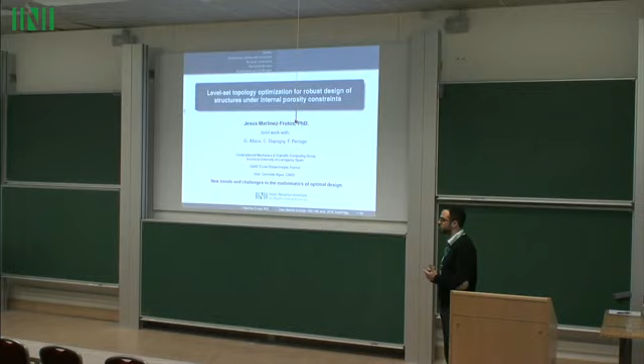Well, thank you. First of all, I want to thank the organizers for inviting me to this workshop. I'm going to talk about a topology optimization approach that deals with the negative porosity effects that appear during manufacturing as imperfections. This is joint work with Grégoire Allaire, Dapogny and Francisco Periago.

Well, this is a brief outline of this presentation. Before presenting the proposed porosity constraint and numerical results, I'd like to motivate this talk by presenting some examples in manufacturing in which this kind of defect appears.

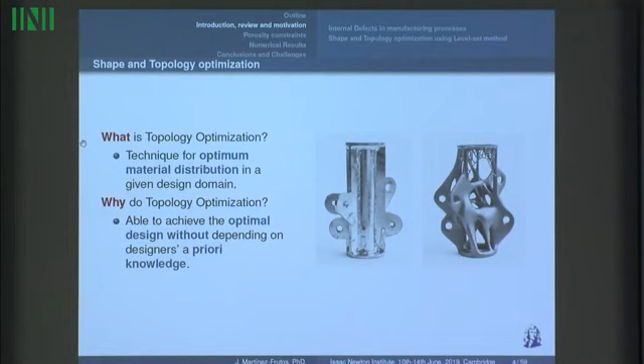Basically, in topology optimization we aim at finding an optimal material distribution in a given design domain, which is subjected to loads, boundary conditions, and possibly constraints, with the final goal of improving the performance of the structure. There is also an appealing feature of these techniques: they provide an optimal design without depending on the designer's a priori knowledge. This makes topology optimization very popular in industry.

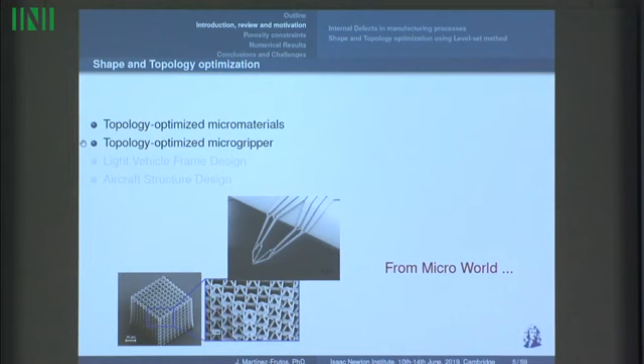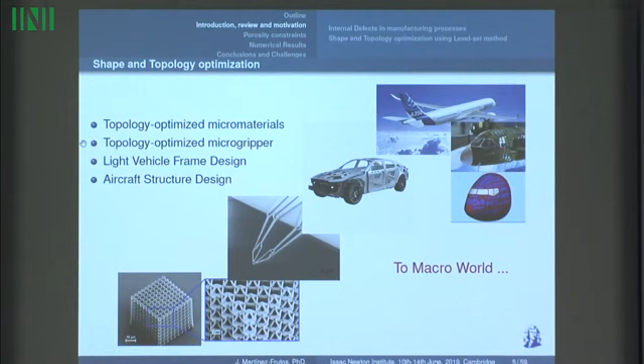Nowadays this field is quite mature, and in the last 20-25 years there has been great improvement and many successful applications of these techniques across many fields, obtaining innovative and high-performance designs at the very early stages of the design process. Some examples are the design of micromaterials, metamaterials, and micro grippers, as well as applications in the automotive and aircraft industries. These two industries have pushed topology optimization methods a lot.

More recently, there is increasing interest in incorporating real-life issues into the formulation of topology optimization, with the perspective of bridging the gap between mathematical models, conceptual designs, and concrete applications. Some examples are those I'm going to present now.

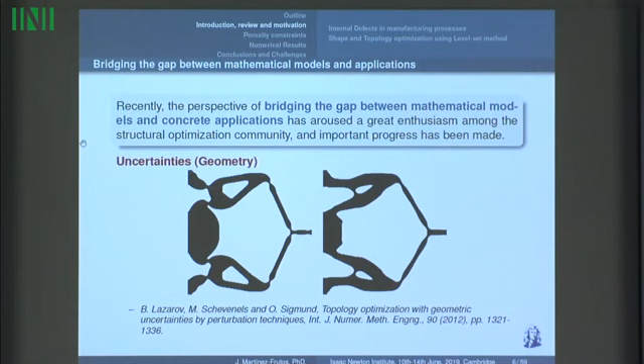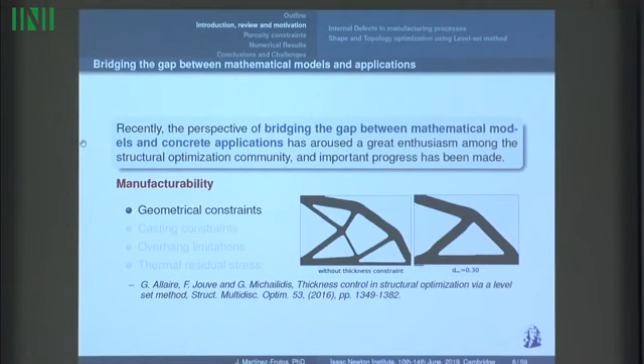Another very prolific research field, which tomorrow we will have a nice presentation on, is the introduction of manufacturing constraints. I don't want to present an exhaustive review here, just to mention some works related to the porosity constraint indirectly. The first is the introduction of geometrical constraints, for instance minimal and maximal thickness. We'll see that this maximal thickness constraint relates to one of the very important defects found in casting, which is shrinkage cavities.

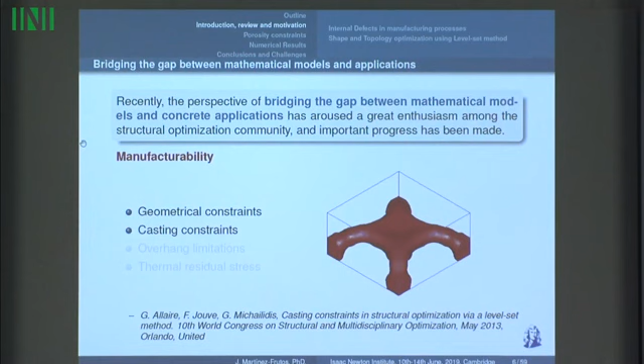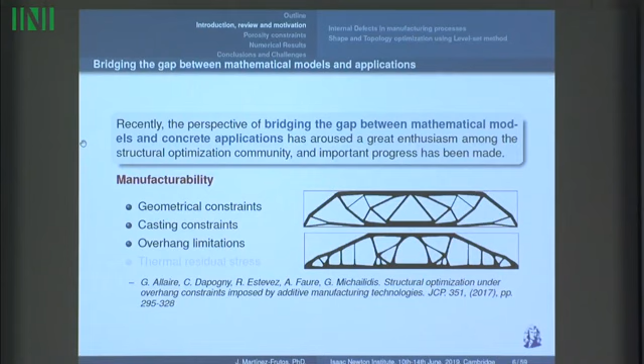Another manufacturing constraint is the casting constraint for moldability. On Monday we saw a presentation about overhang limitations for reducing the material devoted to supporting structures in 3D printing. More recently, there are also improvements that take into account the thermal residual stresses and deformations that can be produced during processes like selective laser melting.

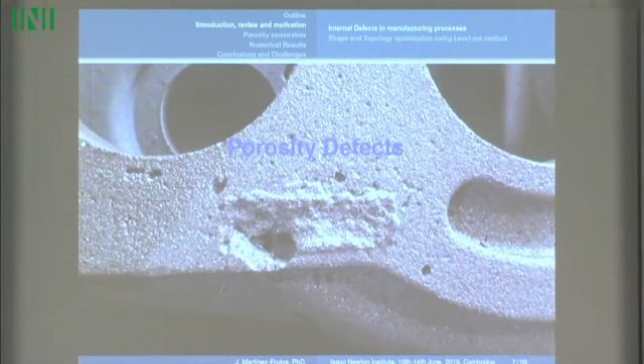This presentation is devoted to addressing the negative effects of porosity. What is porosity? Porosity is the parasitic emergence of small bubbles of air inside the material that occurs during the manufacturing process. For those not quite familiar with these kinds of defects, I'm going to present some examples in which we can find these porosity defects.

The first one is casting manufacturing. In casting manufacturing, we want to cast a metal into a shape, and this is done by melting it, then putting it into a mold, and then removing the mold material once the metal has solidified.

In this process appear lots of issues, most related to the different properties of the metal in liquid state versus solid state. One of them is the different capacity the material has in liquid state to dissolve gases. During the cooling process, these gases get trapped inside the material and lead to defects known as pinholes, which are very tiny holes very close to the surface, and we will see they are very related to failure due to fatigue.

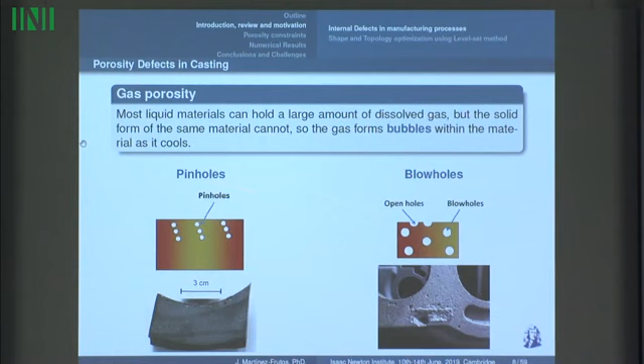We can also find other kinds of holes, which are larger cavities found inside the domain. These are two examples of real situations in which we have these two defects. Another important defect found in casting manufacturing is shrinkage cavities.

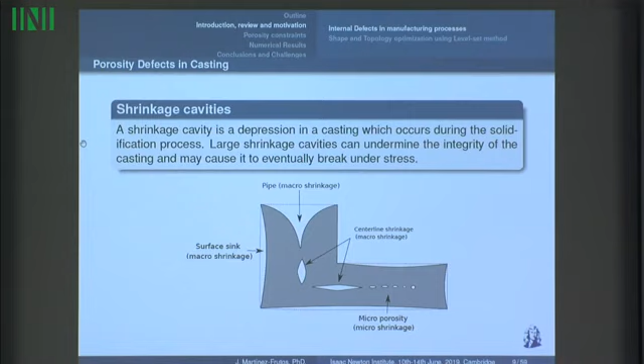The shrinkage cavities are cavities that appear due to the different density that the metal has in liquid state and in solid state. During the cooling process, the metal retracts a little and gets more dense, leaving the hot spots of the structure without any material. This defect is very harmful because it's related with fracture and other kinds of degradations of the performance of the structure.

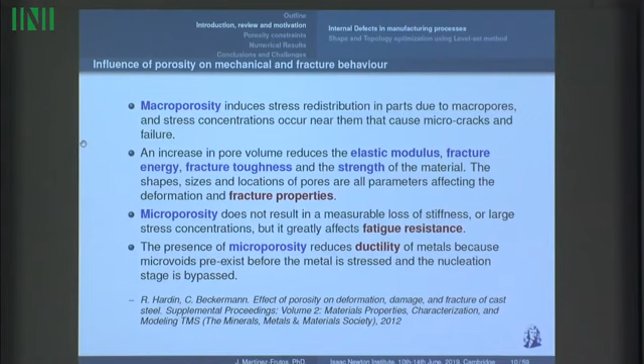Here we have some relation between this porosity defect and the mechanical and fracture performance of the final casting. There are some references, one of them by Hardin, that studied this effect of porosity on the deformation, damage and fracture of cast steel. Basically it's divided depending on the size of the holes.

For macroscopic porosity, this introduces a redistribution of the stress inside the solid, and also there is a stress concentration around the macropores. This can cause micro cracks and failure. Also, this size of the holes is related with degradation in the elastic modulus, fracture energy, and fracture toughness. So macroporosity is related with failure or fracture.

On the other hand, we have microporosity. This microporosity does not result in a loss of stiffness or stress redistribution, but greatly affects fatigue and ductility. So those are some of the consequences of having these kinds of defects inside the structures.

Apart from casting manufacturing, porosity also appears in other manufacturing processes like welding. In welding, when the weld pool is melted, there are some gases that get trapped as it solidifies. So we have this kind of defect, which are small holes, and also other kinds of defects like incomplete penetration, root crack, and lack of fusion, that also can be treated with the formulation I'm going to propose later on.

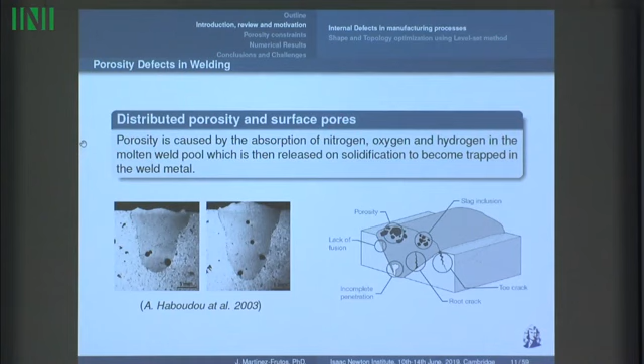In the new additive manufacturing processes we also have porosity. This porosity can be reduced a little bit by controlling the processes to produce the powders for 3D printing, but we cannot eliminate them 100%. So it's required to develop new techniques that make the final structure more robust against this kind of defect.

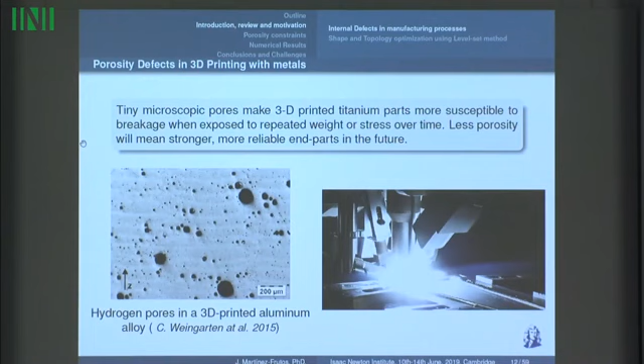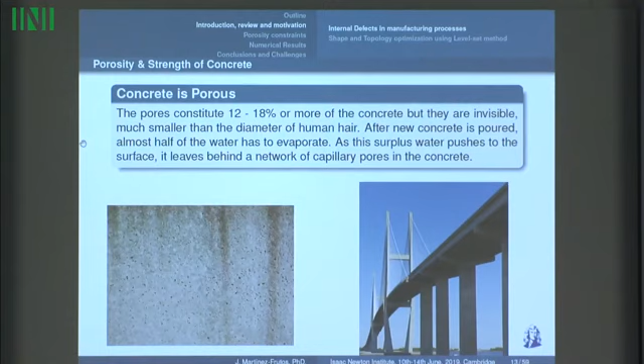Apart from metal, finally we have other materials which are porous, very commonly used in civil engineering and also in architecture, for example concrete. Concrete is a composite material composed of water, cement, and some small stones, and when this water evaporates, it leaves behind a network of capillary pores in the concrete, which are very much related with the strength of this material.

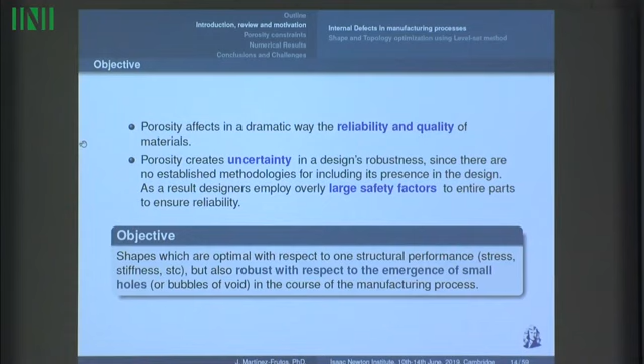So we have seen that this porosity greatly affects the reliability and quality of these materials. We need to develop new techniques to take this porosity into account in the design process. So the objective of this talk is to introduce an approach that provides optimal shape against the emergence of these small holes in the course of the manufacturing process.

In the literature, there are other works that do not consider porosity explicitly in the formulation, but introduce other kinds of manufacturing constraints that can address these defects implicitly. Some introduce casting constraints on geometry and thickness, and others introduce constraints on the cooling process. The cooling process is very related with the shrinkage cavities, so controlling this process indirectly facilitates the reduction of porosity effects.

So the problem is shape and topology optimization. When we want to minimize some function, we need to choose an objective function J. The problem is to find a subdomain, capital Omega, which is contained in a set of admissible shapes that contain the Dirichlet region and the Neumann region, and also a volume constraint. These minimization problems could also have some constraints—the porosity constraint we are going to see later on.

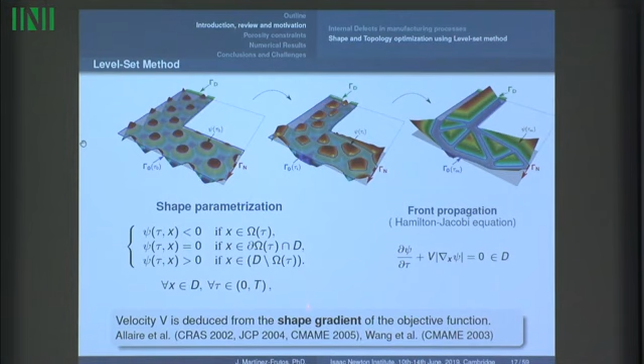So there is a method for computing the shape gradient that goes back to Hadamard and consists of parameterizing the variations of the shape with a vector field theta, so that every point x in the boundary goes to a new point theta of x in the variation of the boundary.

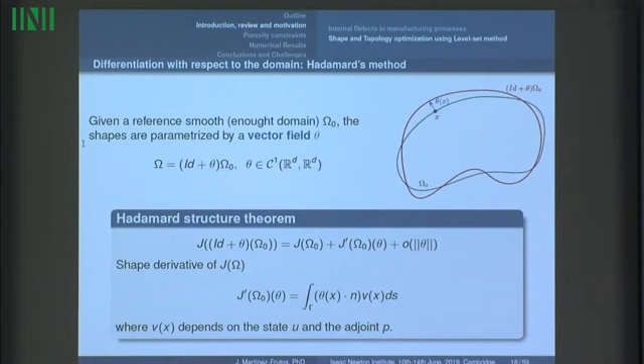So skipping some of the details, there is a theorem called the Hadamard structure theorem that gives you the shape derivative whatever the function you want to differentiate is. This shape derivative is given by the integral on the boundary of the normal component of this vector field theta, times a function v. This function depends on the state equation and the adjoint equation. So basically these are some notions of shape derivatives.

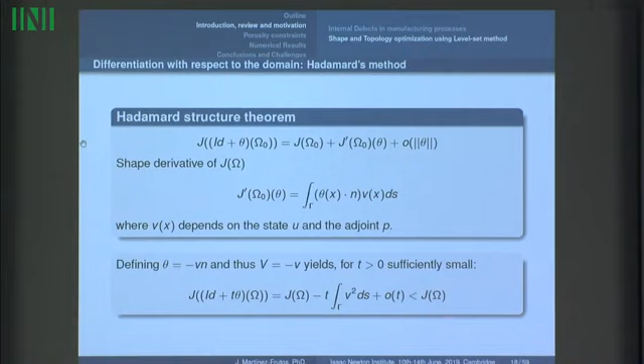Well, with this shape derivative, what we need to do is determine what this velocity is. So we can make the choice of taking theta as the product between v and n, and take it negative to have a negative derivative, so we have a descent direction. We can infer from here that the normal velocity is minus v.

Well, once I have introduced the problem a little bit, I'm going to show you some of the constraints we have developed to take into account porosity. The main objective here is to obtain shapes which are optimal with respect to structural performance, but at the same time are robust against the emergence of small holes inside the domain.

So imagine a domain capital omega in which we have a point x. At this point x, we create an infinitesimal hole with radius rho. So the perforated domain is this one, capital omega x rho. This objective, this requirement, is given by this expression, which tells us that the functional evaluated in the original domain cannot be degraded more than a certain percentage eta when evaluated in the perforated domain.

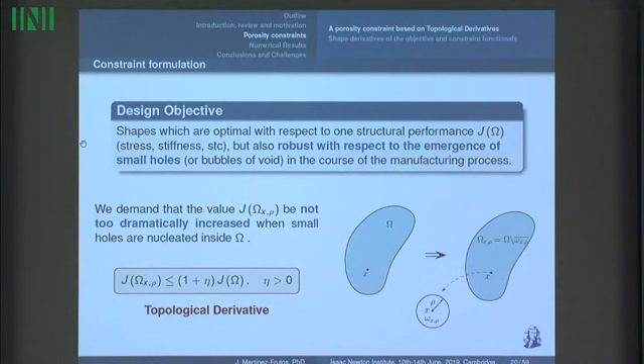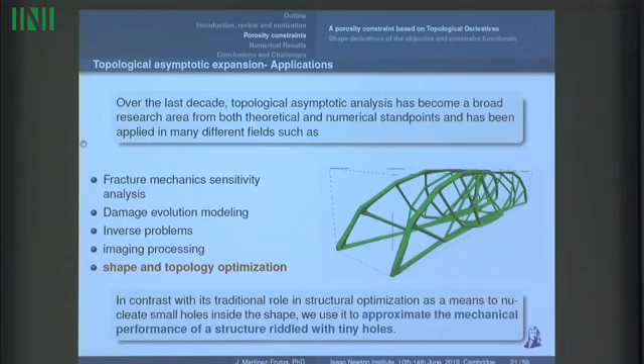So this expression we need to transform into an inequality constraint. We are going to approximate this term using an asymptotic topological expansion and the topological derivative. This kind of asymptotic expansion is commonly used in many fields, particularly in shape and topology optimization, where the topological derivative is used to nucleate holes and remove material inside the domain. We are going to use this topological derivative in a slightly different way, to approximate the functional in the perforated domain.

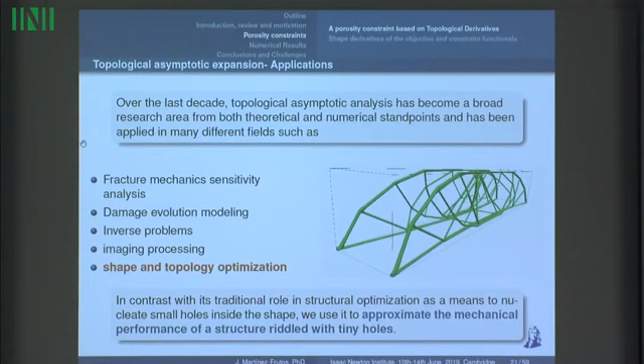So there are some remarks I'd like to mention here. The first is that in the asymptotic expansion, we assume that we just create a single infinitesimal hole. But in real cases, we have many holes. So if we repeat the derivation I presented before, taking into account that small omega is the union of a set of many holes at different positions, this constraint can take into account the effect of all of them.

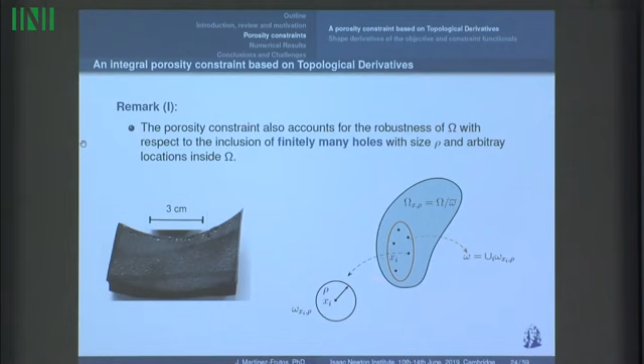The third remark about the porosity constraint is related to defects in the boundary, because we assume that in topological gradient the hole is inside the boundary. So what about if we have a defect in the boundary?

So we have two possibilities. One is to consider the topological asymptotic with respect to a singular boundary perturbation, which we can find in this paper. Another choice is to model the problem as an optimization under uncertainty problem, in which we have a random field that models the perturbation of the boundary. So we could introduce this random field into the vector field theta to consider variations of the boundary.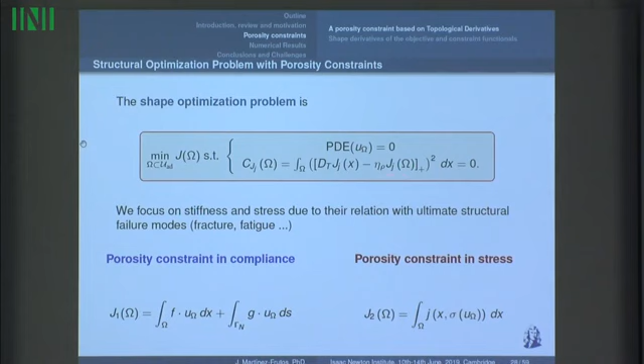In this presentation, I'm going to show you some results when we use the porosity constraint for compliance and this porosity constraint for stress. So let's look at how the shape derivatives look for these two porosity constraints.

The first one is the compliance. For the case of compliance, it's well known that the problem is self-adjoint and we have this shape derivative. And in the case of the porosity constraint, we have this topological derivative of the compliance that has this form, depending on three scalar values containing the Lamé coefficients.

And if we take the shape derivative of this porosity constraint, we obtain something like this with three terms that are integrals on the boundary, on the free boundary, and an adjoint p omega emerges due to the state equation that we impose in the Lagrangian during the calculation of the shape derivative.

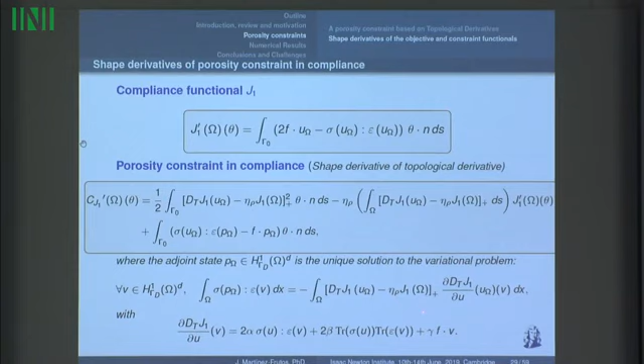This p omega, this adjoint state, is the solution of this PDE in variational form that is quite similar to the linear elasticity system, but with a different right-hand side that includes the partial derivative of the topological gradient with respect to u. So here we are doing the shape derivative of the topological derivative.

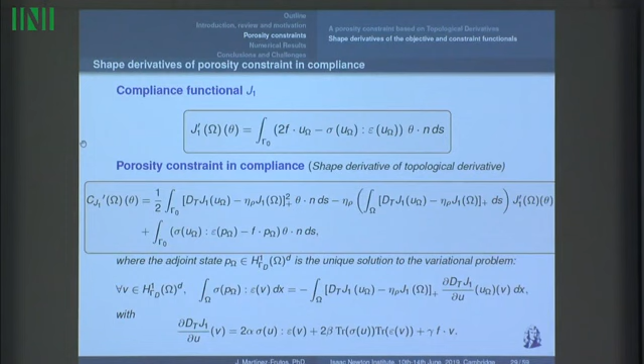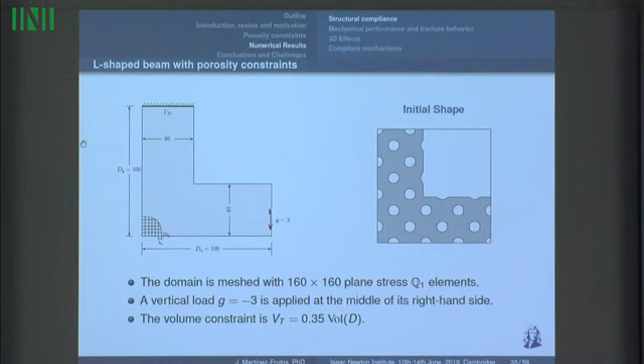A note on the numerical implementation: first we solve the problem without any porosity constraint and obtain an optimal design. This optimal design becomes the initial guess for a second stage in which we impose the porosity constraint. We use this two-stage approach because imposing the porosity constraint directly on the intricate designs from the first iterations leads to a local minimum with very poor structural performance. So we start from the initial guess to obtain an optimal design that also minimizes porosity.

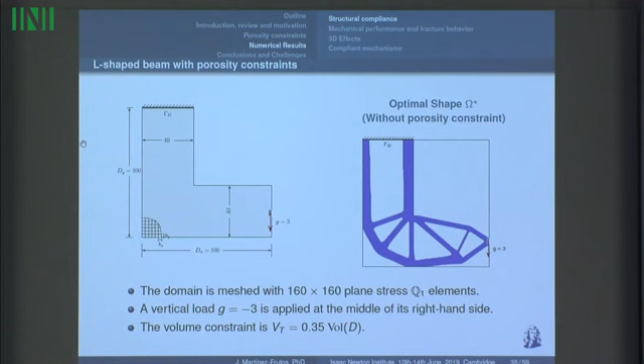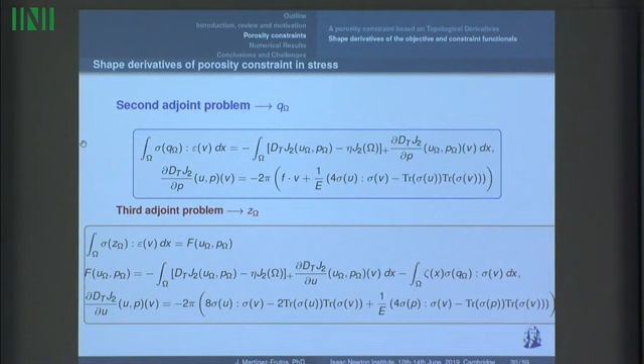These results were achieved with eta equal to 0.01 and the porosity size rho equal to 0.625, which is the size of one cell of the mesh. You can choose other sizes for rho, but remember we have a parameter eta times rho in the constraint. Let me go back — this eta times rho is the only thing that matters numerically, from the numerical point of view.

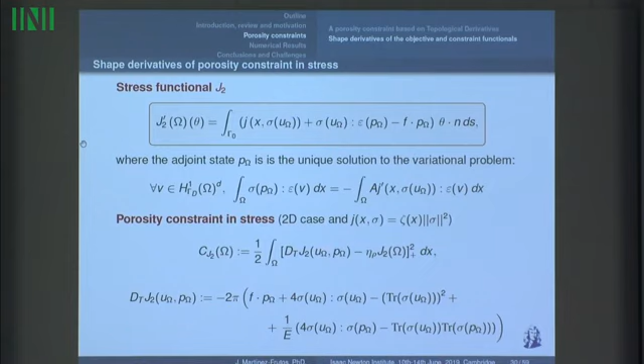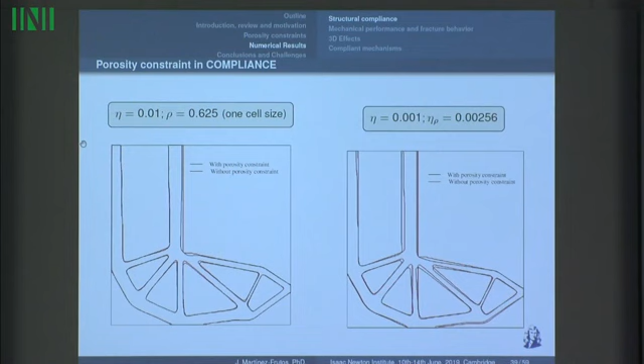Let's see what happens when we introduce the porosity constraint in compliance. In this case we have similar changes in the optimal shape. The peak value is also greatly reduced, and this topological optimal shape seems to be the same as the previous one — very, very similar, but we will see later, when analyzing fracture, that it has slight differences.

When we introduce this porosity constraint in stress, we also get extra benefits: the stress level in the structure is reduced, with the peak stress going from 11 to 1.3.

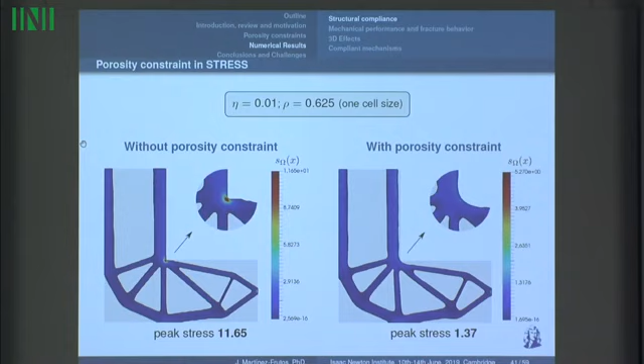Now we want to analyze all these designs against fracture. Before doing that, I want to introduce some notation about the simulation. We are using a phase field method, which basically smooths a sharp crack surface by introducing a parameter S, the phase field parameter, and an L0 parameter, a length scale parameter.

As customary in the phase field method, we have two coupled PDEs. The first is related to the mechanical problem, the second to the evolution of the phase field parameter S. The mechanical PDE is quite similar to the elasticity system, but with a degradation function g applied to the stress tensor. In the second PDE we have g prime, the driving force, psi E the elastic energy, and Gc the fracture toughness.

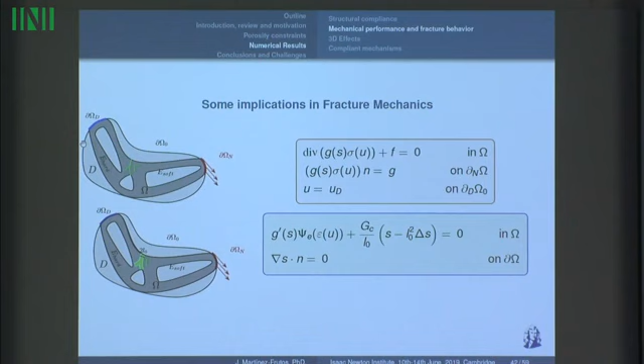We solve this coupled problem in a staggered way, using 100 iterations or load steps, and these are the results of the simulation. Here you can see that the first design to start fracturing is the one with no constraint, which starts fracturing around iteration 55 or 60.

Then the other designs that fracture in these numerical experiments are the design with the compliance constraint, the porosity constraint in compliance with these two values of eta. Notice that for this value of eta, the design has broken a bar, and in this design the fracture just has initiated. In the case of a stress constraint, we don't have a fracture for this load.

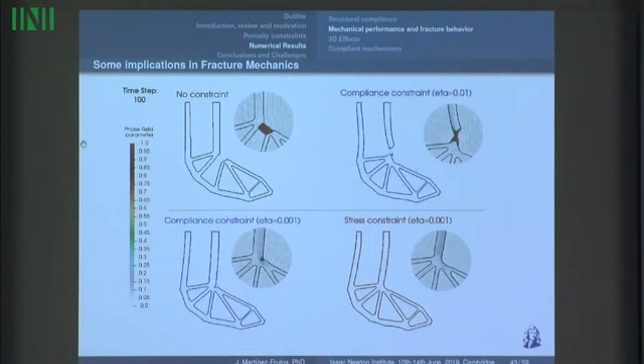These conclusions can be seen if we represent the force versus the displacement. For the design that we obtain without the porosity constraint, we have a fracture here, and there is a remaining stiffness in the design because it still has some stiffness after this fracture, so the curve cannot get to zero, it stays here. Next we have a fracture for the blue curve and for the green. These two are the two designs that take into account the porosity constraint for compliance.

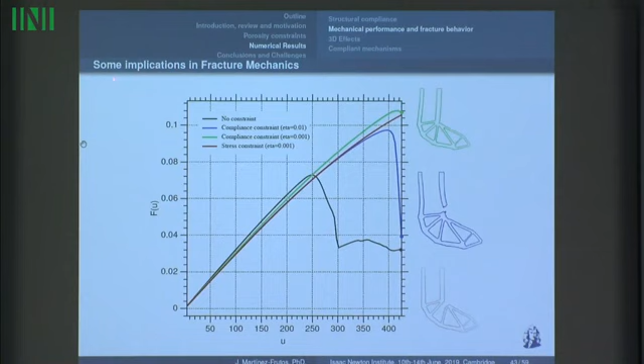In the second example, I'd like to show you some 3D effects that appear when we introduce this formulation in a 3D example. We want to analyze the impact that the porosity constraint has on the design in 3D, and it is expected that this impact is in regions with very small features. So we need to mesh this domain with a high resolution mesh. We use 2.5 million elements, giving around 8 million degrees of freedom, and we also use a very small volume constraint in order to have these very small feature sizes.

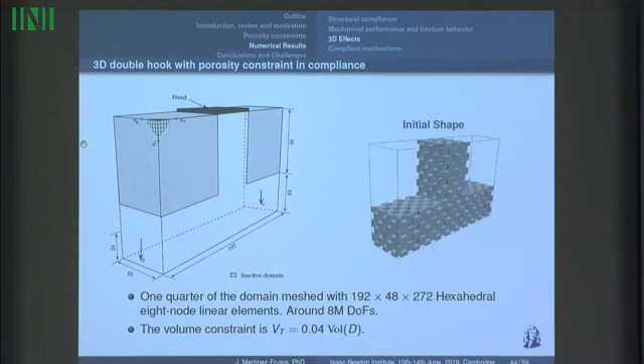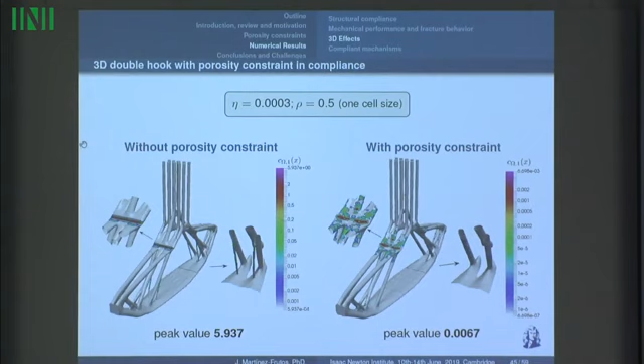This is the design that we obtain first without imposing the porosity constraint, and taking this design as an initial guess, we have this other design. If we compare both, the peak value is also reduced 3 orders of magnitude, and we see that the porosity constraint eliminates thin bars of the structure and rounds the corners to smooth sharp regions. But there are other effects: if we zoom here, we can see that in the out-of-plane direction, the surface of this corner is inflated. So we also have a 3D effect when we solve the problem with this porosity constraint.

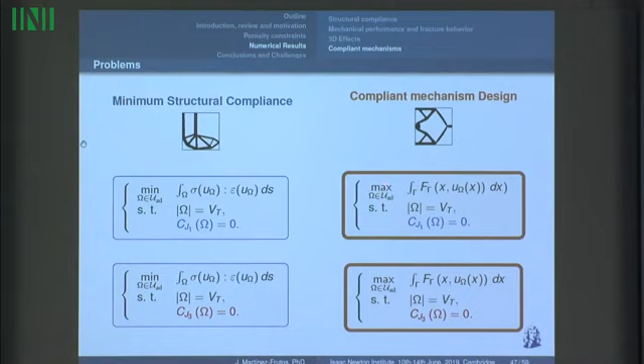Let's see now the second experiment. The second experiment is devoted to the design of a compliant mechanism. We maximize an objective functional that depends on the displacement, and in particular this objective functional here. We are going to solve the inverter mechanism problem, which consists in maximizing the horizontal displacement in the output region, and at the same time minimizing the input displacement in the region where we introduce a Neumann condition.

This is the objective function that we introduce, combining these two displacements, each with a weight. The horizontal displacement for the input has a weight of 1, and the horizontal displacement for the output has a weight of 2.

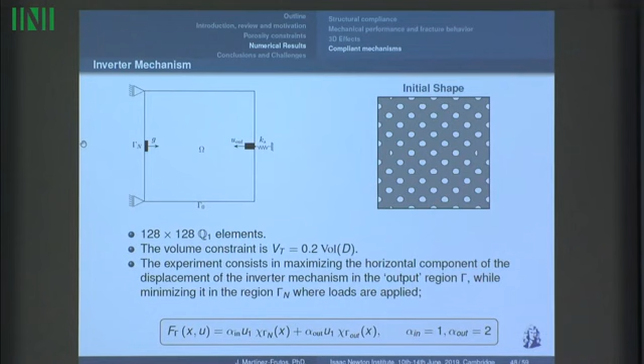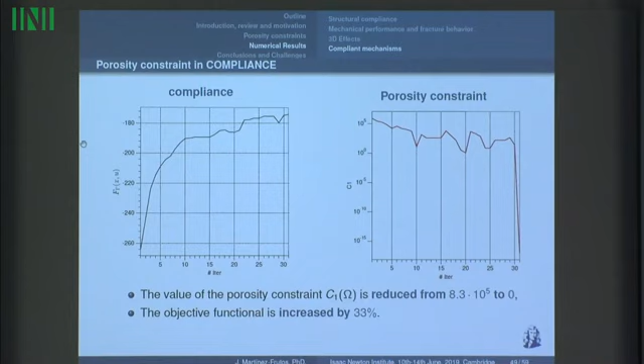The optimal shape that we obtain without imposing this porosity constraint is this one. If we impose a porosity constraint in compliance, we see that we have a reduction to 0 of the constraint, but at the cost of increasing this functional by 33%. This is something we could expect, because we are trying to maximize a functional related to the flexibility of the mechanism, while introducing a porosity constraint in the compliance, which has to do with stiffness. So we have something like a multi-criteria problem, which we can control by modifying the parameter eta in porosity.

We see that these results correspond to these two designs, and here we can clearly see that we can eliminate the porosity that appears in regions close to hinges, which are very weak regions, and these regions increase in thickness to eliminate this porosity sensitivity. The consequence is that the output displacement is not as high as the displacement we had with the design without this porosity constraint. So this is a small drawback of this problem, but we can control it by modifying this parameter.

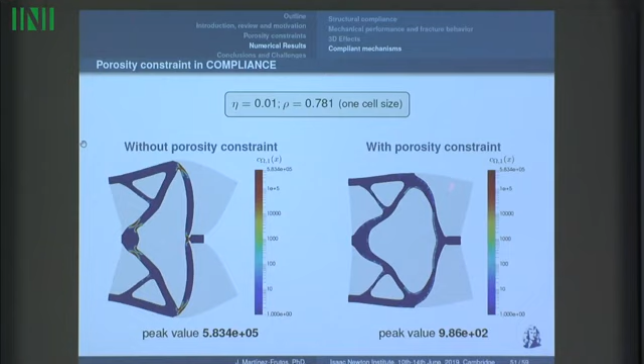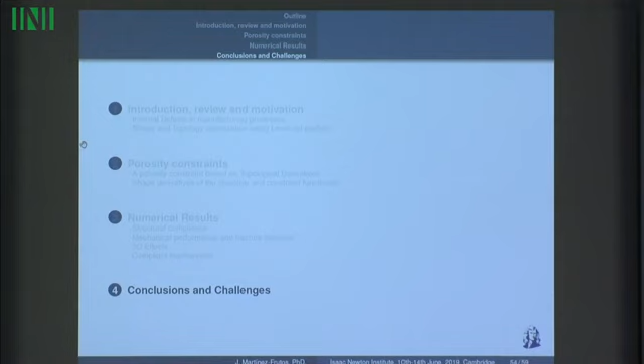Finally, after this numerical example, I'd like to talk about some conclusions and possible future work of this formulation. The first conclusion is that we achieve the main goal I presented before: alleviating the impact of the parasitic emergence of small bubbles of void inside the domain during the manufacturing process. This is the main objective we obtain with this formulation.

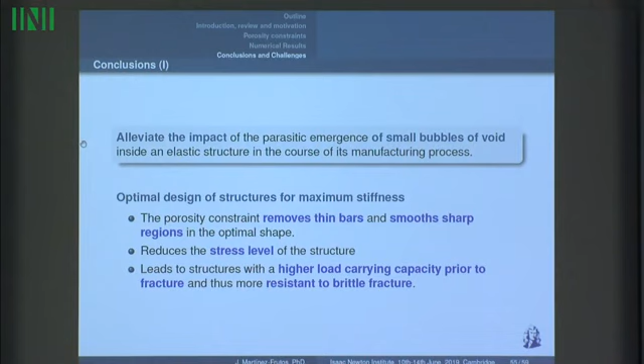Also, with respect to the optimal design of the structure, this formulation removes thin bars and smooths sharp regions of the shape. As a side effect, it also reduces the stress level and provides a higher load carrying capacity prior to fracture. So the designs are not optimal for fracture, but have better behavior against fracture.

For the case of optimal design of mechanisms, the conclusions are that the weak regions prone to create hinges are reinforced, and there is also a reduction of the stress level of the mechanism. In the experiments I performed, there is a reduction of the influence of this porosity at the cost of degrading the objective function, which reveals some kind of multi-criteria nature of the problem, but this can be controlled by tuning the parameter eta.

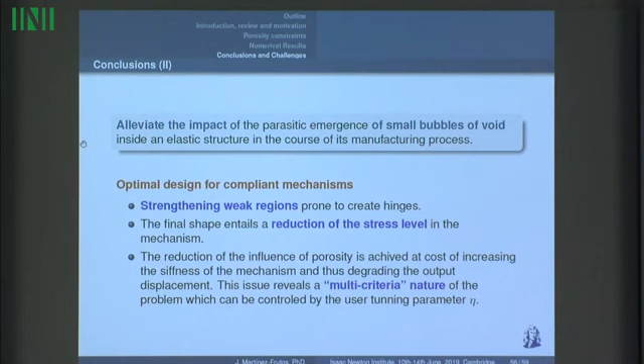Finally, there are some other conclusions related to the computational efficiency of the method, because we can understand this method also as a post-processing stage of traditional shape optimization, since with a very low number of iterations we can improve the design in terms of stress and fracture. We have also taken into account porosity, but using a macroscopic approach.

Another advantage of this approach is that it's valid for different manufacturing processes and also different materials, because we have not particularized for any kind of manufacturing process. It's general, but at the same time has the flexibility to fit these two parameters to a specific manufacturing process.

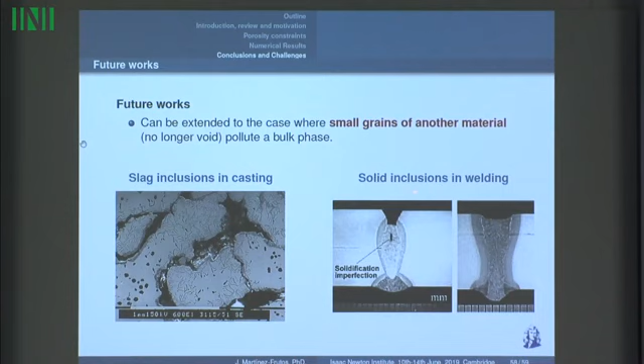As future work, we could extend to the case where small grains of another material are included inside a bulk phase. With this extension, considering the topological derivative of an inclusion, we can address problems like slag inclusion in casting and also solid inclusions in welding, like this one.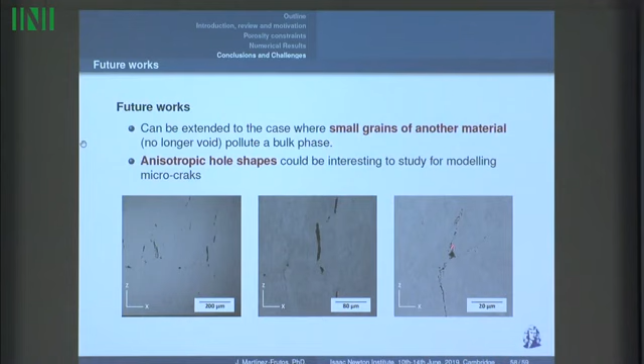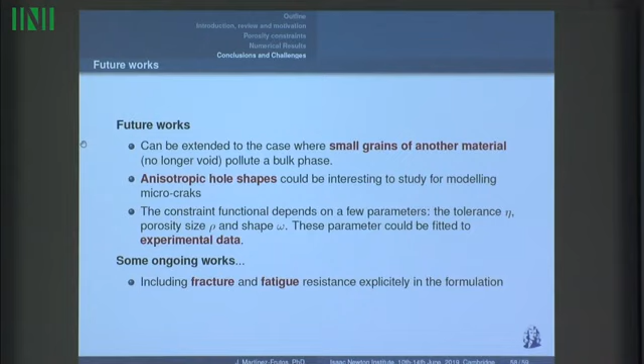Also, as I said, we can fit this parameter to experimental data as well, and there are also some ongoing works devoted to including explicitly the fracture and fatigue phenomenon inside the formulation, because in the experiments I presented before, we have an improvement in fracture, but the design is not optimal for fracture since it's not included in the formulation. So one possible improvement is to include fracture inside the topology optimization formulation.

Finally, you can find more details about the shape derivatives and some proofs in this paper we just published. That's all I want to talk to you about today. Thank you.

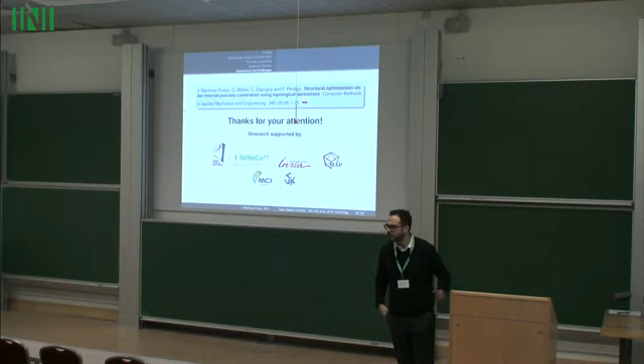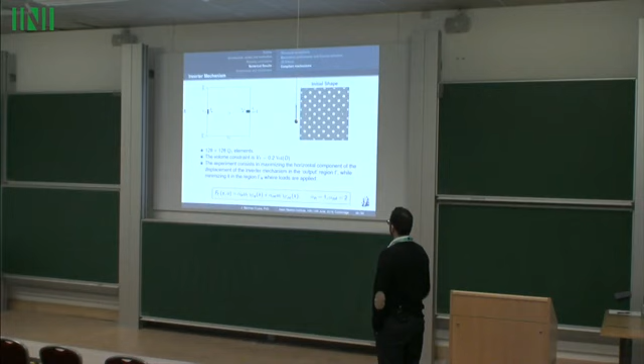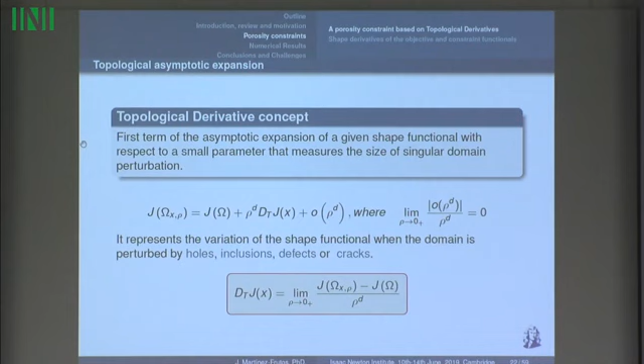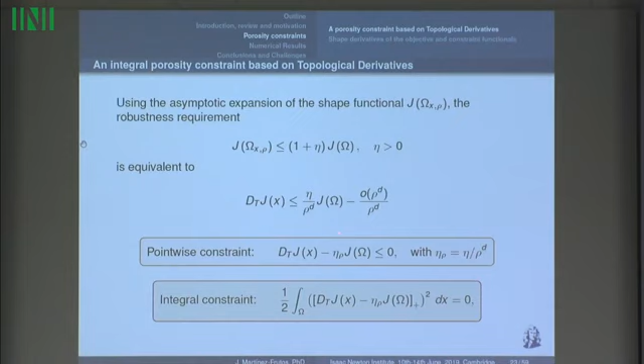Question: when you build your cost function, you have a quadratic penalization of your porosity constraint. When you build the cost, once you have the topological derivative, was it the integral here? Answer: After here, yes, it's squared. Question: So you cannot guarantee that you fulfill the constraint. Answer: If this constraint holds at any point, taking this norm, you can transform it into this other integral form, and if this is zero, this is the positive part.

Question: Since you have a square, did you try another power? Answer: No. Question: Would it be useful? Answer: I don't know. I didn't try any other exponent because the constraint is indeed fulfilled, as I checked in the final results. So I didn't think about introducing another exponent. It's surprising that it's fulfilled with the square.

You are right. Okay, so there was a question over there. Go ahead, please.

Question: So the size of your hole is dependent on an element in the mesh, right? Answer: Yes. Question: Did you do some convergence studies where you increase that? Answer: No, I just take the smallest element as the radius of the porosity.

Question: I'd be interested, if you take twice as fine a mesh and then take a hole of 2 elements, do you see the same result? Answer: I don't expect the shape to change, because when we change this porosity constraint in compliance and change to stress, the effect is quite similar. So I don't expect refining the mesh to give something different in this example, because this problem is very local here.

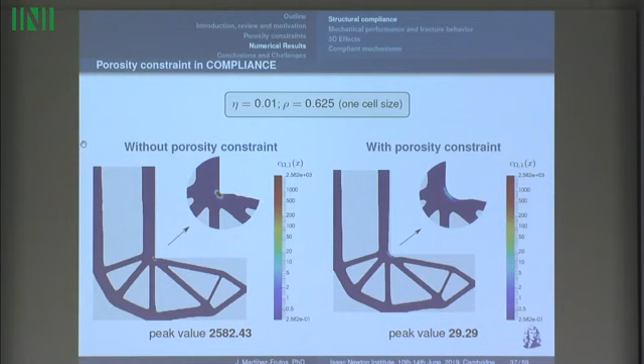Yes, Michael. It nicely combines topological derivative and these pores, but that assumes that the pores are quite isolated. In this application of shrinkage cavities, we have lining up pores, and they strongly interact.

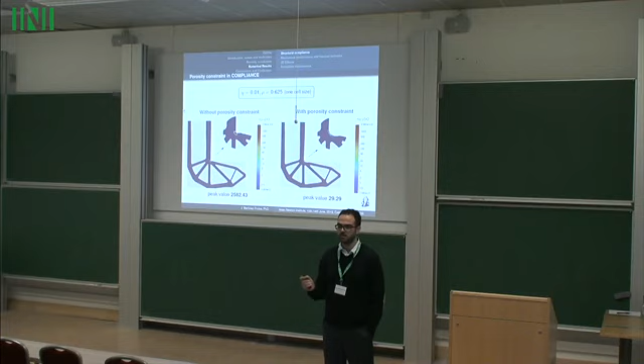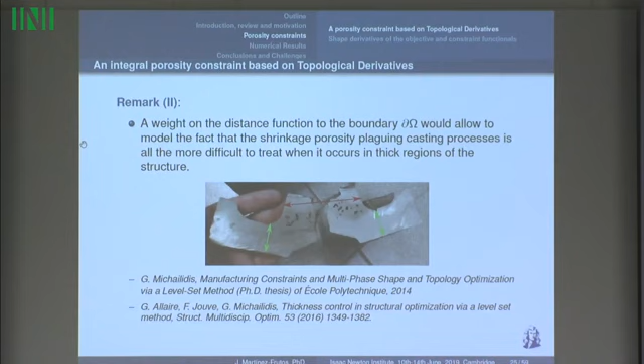So how does this conflict with the... I know what you mean. You are right, but at this moment I haven't come up with a way to take this into account, because it's based on topological gradient, which is basically an infinitesimal hole. And you have seen that these kind of defects, like shrinkage, are not infinitesimal, and are very close, so each one affects the other, and there are some complicated effects there that I think are difficult to model in a macroscopic way.

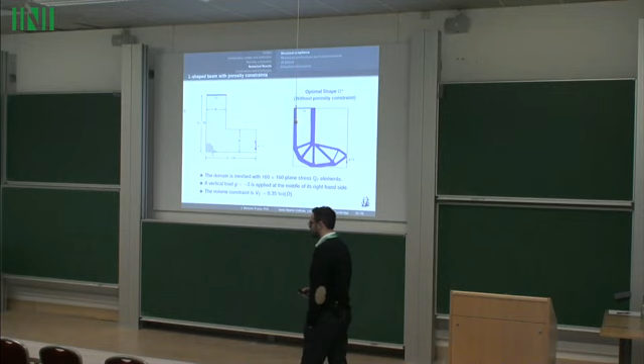Further questions? I have two very short questions. One is, in the old days, people used to think that one should try to relax these problems and do absolute energy minimization or compliance minimization. Your method, at the beginning of your talk, was to introduce infinitesimal holes and define a shape derivative. Of course, at some stage in the iteration, it could be best to introduce a finite size hole, or maybe two finite size holes, whereas that might not be picked up by the shape derivative of an infinitesimal hole.

I guess Grégoire would remember this. These were issues that people discussed many years ago. Is there a relaxation approach to these kind of problems, or is there a reason not to consider those approaches? To my best knowledge, I don't know.

Second question is on slide 51. I don't completely understand the objective function, but it almost looks like this point on the right, you want to have a large motion of that point, and the point on the left, you want to have a small motion with an applied force. Yes, so it's like a little actuator. And then you find out these points that have the porosity.

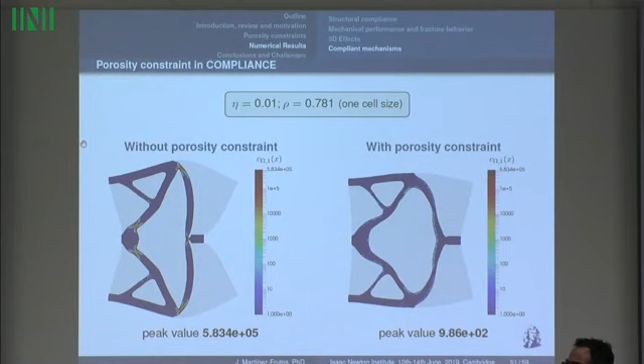I believe if you put hinges where those red marks are, it could be even better somehow. You'd have to allow sliding of material if you have a hinge. In these cases, you need these kind of hinges to get this motion, but maybe if you introduce some kind of hyperelastic material, you can get this displacement with large deformation without having these kind of things. But with this kind of material, you need these hinges to obtain the displacement. But I'm thinking in terms of an actual hinge where the material, naturally in the optimization, ends up with something like this. Yeah, but with sliding you need to know a priori where the hinge is.

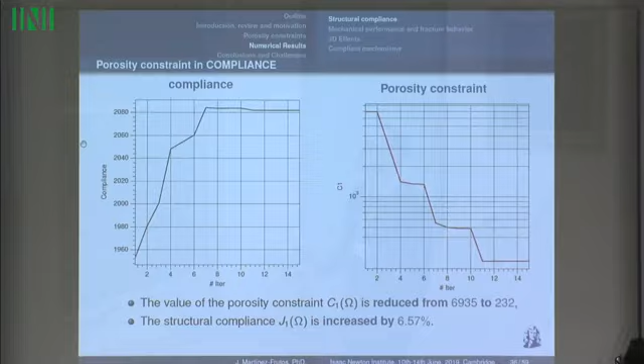That's a problem. But to go on your comment, the typical application here is micromechanism, etch in silicium or whatever. So at a very small scale, you don't want to use a hinge. Okay, but that's an academic test case.